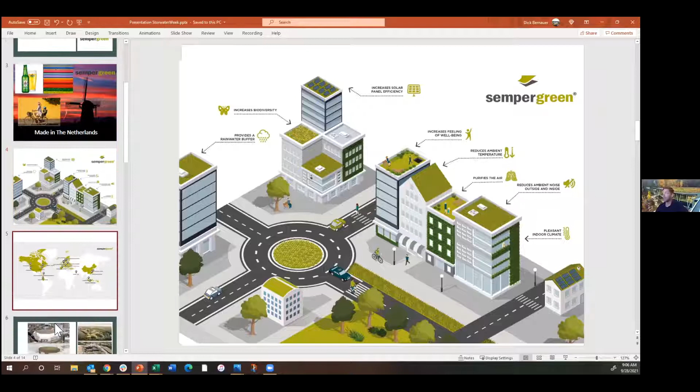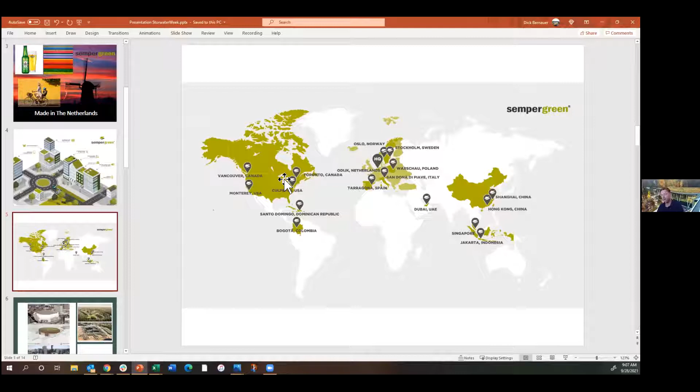Instead of doing it with cuttings or plugs, we created a product called the sedum mat. It was completely covered with drought tolerant sedum plant varieties that you could roll out like sedum sod or grass sod and green your rooftops on day one. That got a little bit out of control, because now we have multiple locations all over the world. My portion is I'm responsible for the Canadian, the US, and also the Mexican market as far as green roofs and living walls. I won't touch on living walls today, but I'll just stick to green roofs.

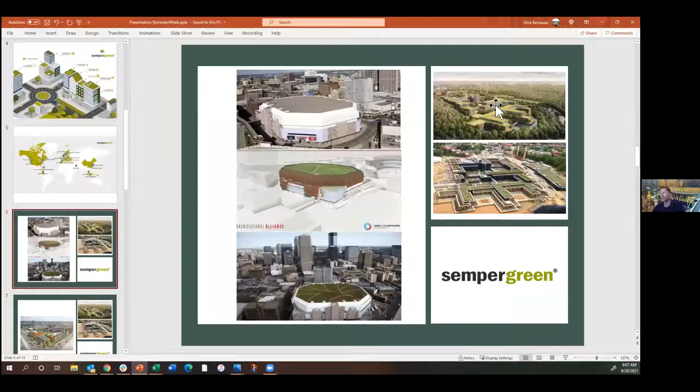Like I said, this is the Target Center, and I feel like it had more to do with the PR portion of green roofs rather than the stormwater management reasoning behind doing a green roof. But it went from a very bare, ugly roof to a fully planted green roof. Same with the US Coast Guard, 510,000 square feet of greened rooftop. New York City now has a mandate. Chicago has a mandate. DC has a mandate. And it's all based on how can we bring biodiversity back into the city? How can we create some stormwater retention?

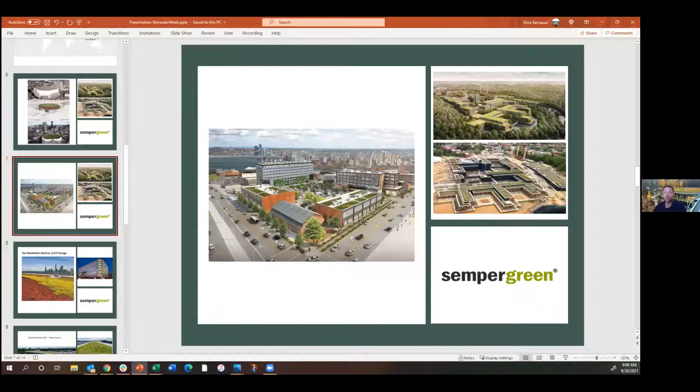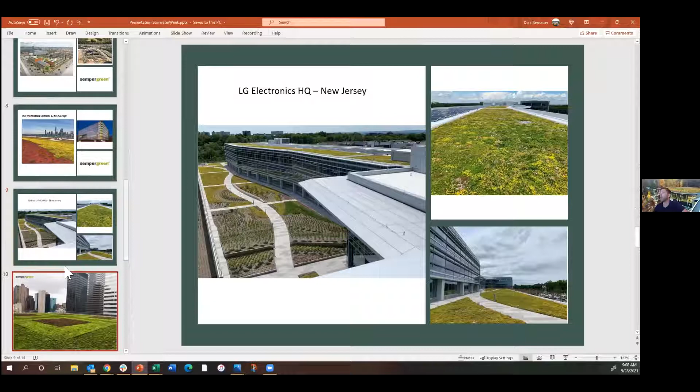Minimizing the amount of water that goes into the sewer system, and often a combined sewer system. So where some projects are done still for aesthetics, more and more people are leaning towards doing green roofs for stormwater management. Simple green roofs. They don't all have to be 510,000 square feet. They can be small. Residences do their garden sheds.

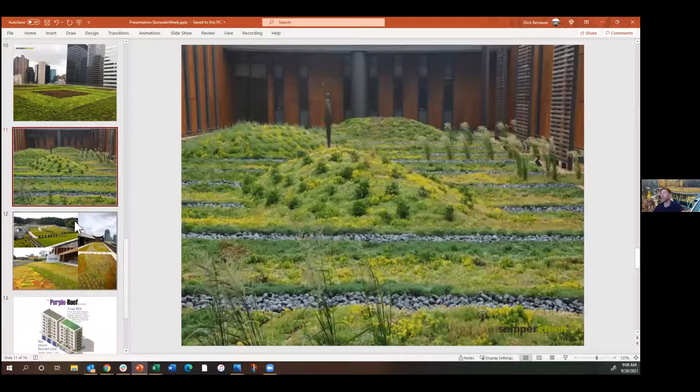I'm going to Aspen, Colorado. Obviously, there's quite a bit of money in beautiful residences, but it's not all the $30 million homes that are turning to green roofs. Then one day we had a very rude awakening where a civil engineer during a meeting said, "Dick, green roofs are beautiful. Green roofs are used for LEED points, for aesthetics, but the industry as a whole is claiming that green roofs are good for stormwater management."

And I agree with that for the most part. But the part that I don't agree with is the reason why green roofs won't be utilized as a stormwater management tool. And they said, it's very simple. A green roof is basically a sponge that you put on top of a rooftop based on how much saturated weight that rooftop can handle. You choose the green roof assembly, and sometimes it's just your succulents. And if you have a little bit more weight available, then you can do a full perennial garden on top of your building. I said, but it's still a sponge.

The sponge has a maximum retention capacity. In other words, you fill up a sponge, at one point it's full, it's completely saturated. And if you keep adding water, that additional water goes straight to the drain. It's one drop in, one drop out. So, well, a green roof absorbs water when it's dry. Once it's saturated, it doesn't have any detention capacity. It doesn't slow down the water that comes after your green roof is completely saturated.

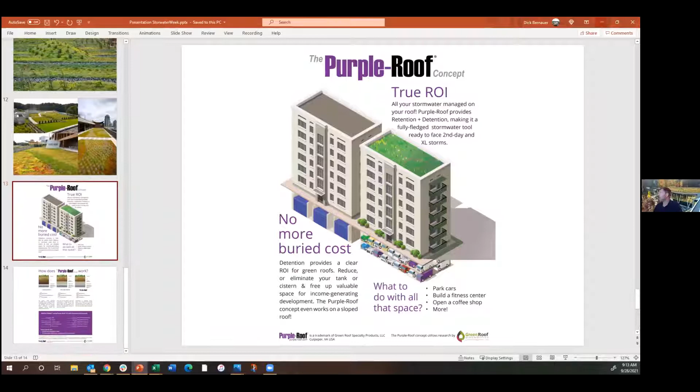And what I wanted to show you now is, I'll share another screen where we developed a tool for you to really look at how to design this.

So thank you, John. So we decided, like, okay, how can we increase the market for a green roof? How can we give value to a green roof? Because I'm in Washington, D.C., and I see a ton of green roofs. But the moment I cross the Potomac River into Alexandria, I don't see a lot of green roofs. And my battle, the Sempergreen battle, is not to get a green roof over a competitor. The mission and the purpose for us is to make green roofs more attractive.

Like, yes, I know they have to make financial sense. And yes, we want to make sure that it's not too heavy that the green roof comes crashing down. So we need to stay within weight capacity, roof load capacity, but we also want to make sure that we create an ROI. So without putting the Sempergreen name all over it, we decided to make a performance-based recipe, and we call it the Purple Roof Concept.

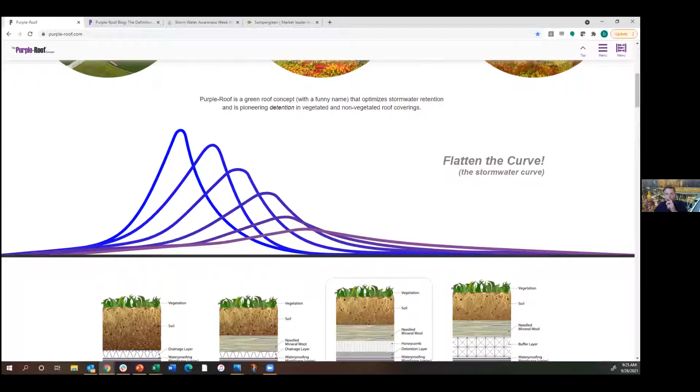Are there any questions so far? Because I'm talking quite a bit. Are there any specific questions so far? And feel free to unmute yourself.

If there's no question, I'm going to go to the tool that we created to design a green roof based on where you are located. And again, this is a non-proprietary concept, so it's not just Sempergreen, because we understand we cannot win every single green roof project, even though I'd love to work with you on projects. We created a retention modeler. So on the top right, there's a menu button, and we say, okay, let's go ahead and design a green roof. The retention model, and you can select a location and a country, because Sempergreen operates all over the world, so we do this all over the world.

Does anybody want to shout out a major U.S. city, or should I just pick one, because it's set for Seattle? But if you have a specific request, feel free to pick a city. How about San Francisco? San Francisco. Okay. We're going to pretend to design a green roof in San Francisco.

So what we have done, and there's a lot of red. Red means there is a lot of stress on your green roof because in San Francisco, there's not a lot of rain. So what you're looking at right now is the average weather per day for San Francisco for the past 25 years. So if we look on today, the 28th, I'm gonna make a prediction if you need an umbrella today, and it's looking like you don't, right? So on the 28th, the average temperature is 65 degrees, and guess what? It's not gonna rain today.

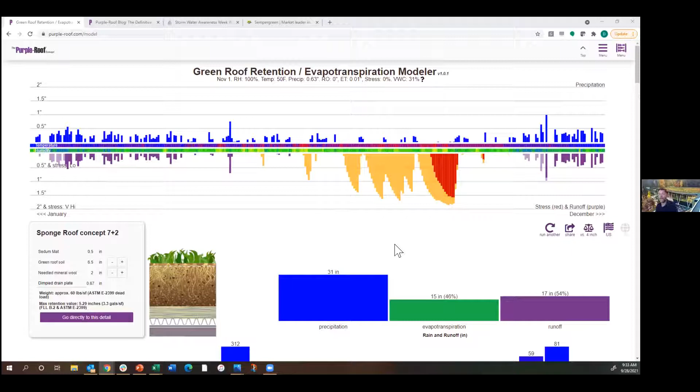So it's really the 15 to 20% of the storms that make the difference between green roofs as a stormwater management tool or green roofs just doing their thing, because it's not going to create any issues. So in San Francisco, you see a little bit higher peaks of rain events, but they happen usually in the winter months only.

Now, for an architect to say, okay, I need exact numbers, you look at this. You click on those details and you see the total thickness, the dry weight, the saturated weight, the retention volume, because in New York, they base the green roof mandate on a specific retention number. So if I change the assembly and make it a little bit thinner, these values will simply change.

So that is, for stormwater numbers, a key tool to determine what my green roof should look like. So you have retention volume and you have the saturated weight. Saturated weight is usually where it all stops, because if we exceed that, you have two choices.

Hey, reinforcing my roof is still a lower cost than those big tanks in the basement, the big cisterns, so it's worth spending the money to reinforce the roof. Or, yeah, I don't want to reinforce the roof; let's see what we can do based on what we already planned on doing.

And then you can create different profiles. If you're not a designer, this doesn't apply to you as much, but architects find this really, really useful. They say, okay, I have a parapet height. I click on the parapet and it's not 10 inches, but it's 14 inches. I don't have pavers, but I have gravel, or I have it all the way to the parapet.

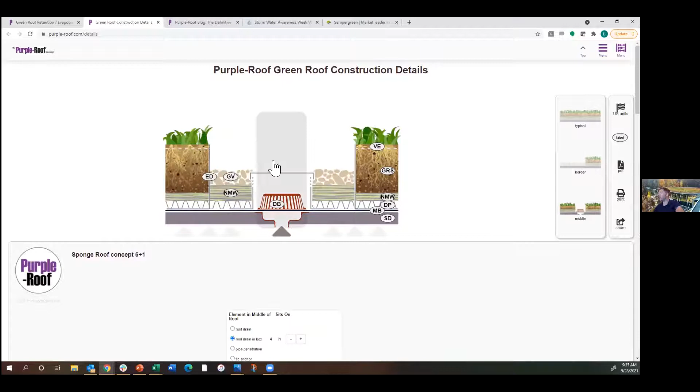The bottom line of this tool: a designer can understand what a detail would look like and what he can do to manipulate this. All these tools can be implemented into the design, or they can share it with the building owner, the architect, the landscape architect, by clicking on a share button. They copy this URL and simply send it to whoever they need to. They click on it and they see exactly what we just did.

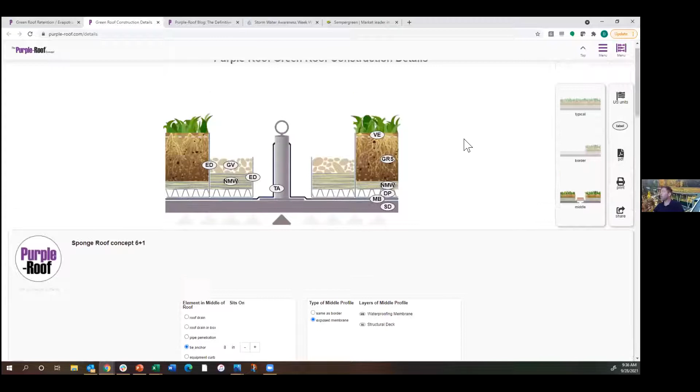So this is all to create a green roof and to create a sponge roof. Now, if we go to detaining stormwater, because this is only retention. The sponge effect is retaining the water. The detention is slowing down the water after your green roof has been saturated. And there's a tool for that.

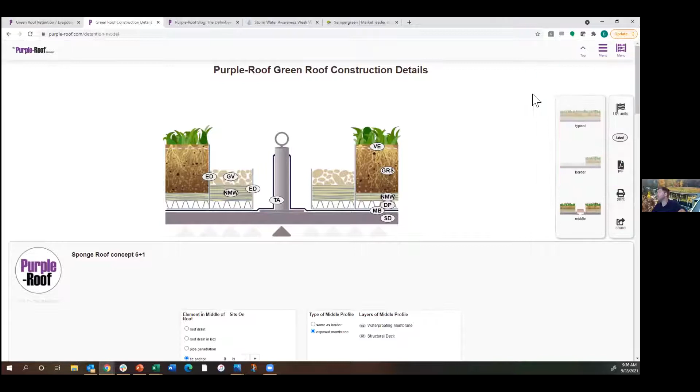If you go to purple-roof.com, you will not see this tool. If we work on a specific project together, you will have access. You can log in to a specific part of this website and you will see your project. I'm just going to pick one, so you can see what this detention modeler can do for your projects.

Perfect example: Princeton University in New Jersey is typically not a big fan of green roofs. Why? I don't know. It's obviously a very high level, well-respected university, but green roofs were just not part of their campus design. So when they were building a few new buildings, they were planning on using a big tank in the basement. Some people on the design team were pushing for a green roof, and they said, oh no, we're not comfortable. What if there's a leak? And then we said, well, what if we use it as a stormwater tool and we kick out your tank?

So you don't have to dig a hole in the ground, dump $1 million worth of concrete in there, cover it up and never be seen again. We should use stormwater as a resource. It's not a burden that we want to put away. We need to make sure that we use it and turn it into something aesthetic. So you get your green roof and you get a lower cost stormwater management tool. And I think we had them at lower cost. That's typical for building owners or developers.

We have a project here. The design storm, which the civil engineer would know about, is type 2, 8.3 inches in 24 hours. That's a massive storm, not the craziest storm, but a massive storm. And we knew that our maximum allowable outflow rate was 0.94. Those are set numbers for any location, anywhere in the world, really. Then we knew the saturated weight that we had to work with, and the slope of the green roof.

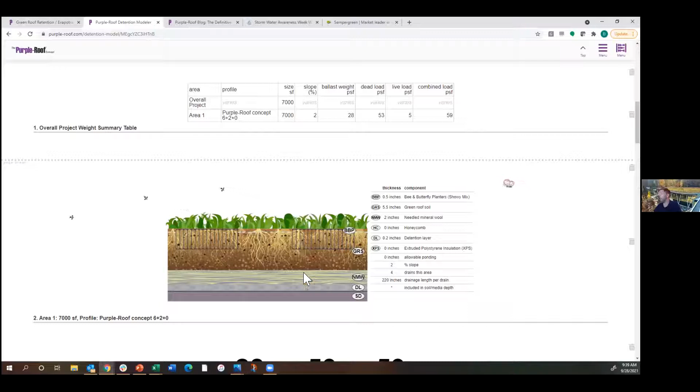Worry more about the thickness of the assembly. And so we have this calculated, our dry weight, our saturated weights. Here we have a hydrology map that says, well, this is your peak of the storm, but we're basically taking that peak of the storm, the volume of water of the Empire State Building, and we're going to lay it on its side. So we're going to delay the outflow of that stormwater. So you don't reduce the volume, or you reduce the volume of water if your green roof is not saturated, but all the testing is done based on a fully saturated green roof.

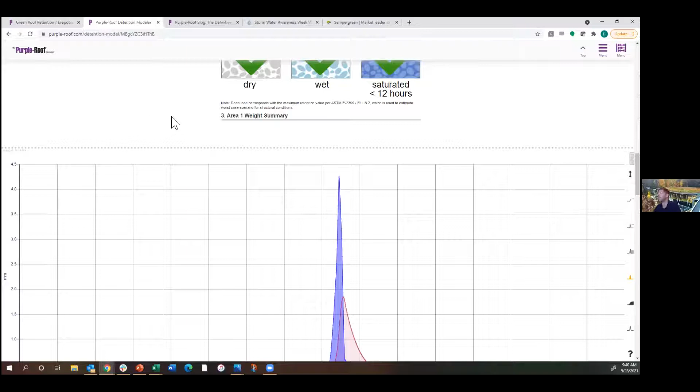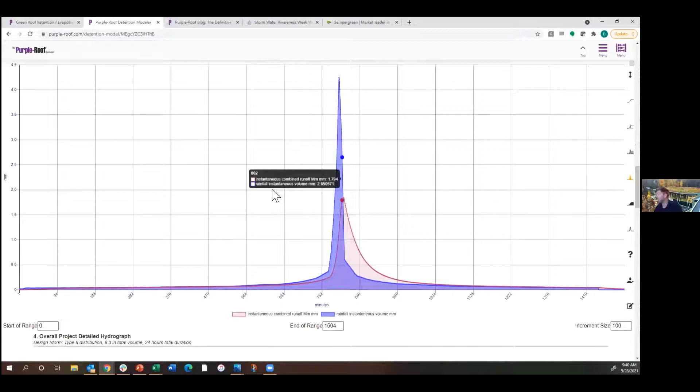So based on that, you see that this assembly, before the water comes out, is delayed by this detention layer; it delays the outflow. The red line is the outflow and the runoff of that roof. We created a 56% reduction of peak flow, and we stayed within the allowable outflow rate. In this case, we were at 0.71 versus the allowed 0.94.

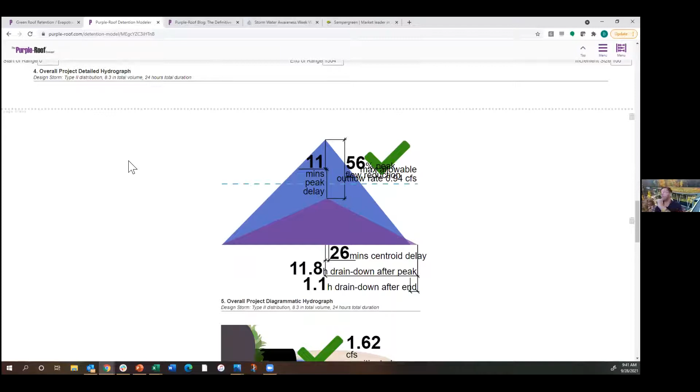Now, I have to say, the first time we make this calculation is probably a big fat red X, because we're letting too much water flow out. This fish will be upside down, not happy. This might not be okay, because we start at a base layer at the thinnest profile, and we start building it up. How about now? Do we stay within our parameters? No? Okay, let's tweak it again, tweak it again. And usually within 30 minutes, we have a bunch of green marks and a very happy fish.

That means we flood the green roof because of that detention layer. We create a bottleneck. The stormwater will fill up the whole green roof assembly, but it's only up to 88% filled. So we will never have the overflow, a completely flooded green roof where the water overflows. So there's no sheet flow. So this is just one example. And I think at this point we have 47 projects in the works where they chose to go with the purple roof concept versus using tanks in the basement.

So when I grew up in a country where everything is green, whether it's parks or common landscape, but also living walls and green roofs, this tool was developed to go on a mission, and hopefully you guys will all be on that mission to make US cities a lot greener, a lot more sustainable, and to get civil engineers, typically the most conservative group for trying out something new, to accept managing stormwater on a green roof, play our little tiny role in managing stormwater on the buildings that we're already building, and sometimes even on an existing building, and make this world a much greener place.